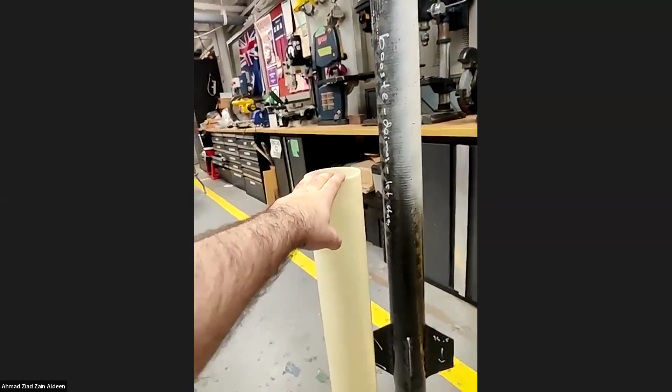We also made a design modification. One of your comments was that the drogue should not be deployed at separation because it's going to be going at Mach 1 almost, well, actually Mach 1.3 something. So one of the couplers, we have an extra piece of it. It will slide inside and it will be closed with more shear pins. That way the drogue will only deploy once it gets to apogee, even when they separate. So the drogue will not deploy at separation at high speed.

Yeah, that would be a bad thing. Hopefully you can piece together the components to show the interstage coupler, or we can look at a drawing so that we can see how the pieces will be laid out. Yeah, for sure. One suggestion that you might consider with the approach that you're using is to instead glue the coupler tube into the top of the carbon tube. Okay.

I'll just give you a term that you can search on, and it's called a zipperless coupler. Zipperless coupler. Okay. Just go ahead and look for that. I did a NARCON presentation in 2021, and it talked about zipperless couplers and why they're good things and why you might want to use them. Since you don't have it installed yet, the concern would be that you're going to be putting out a main and now it has to go through a size reduction. It has to go through the coupler in order to get out.

Yes. And it's actually a better practice to have the coupler in the other tube anyway. So if you want to explore that and maybe look at that as an option, you could do that still. Okay. We will do that. Okay, and that was NARCON 2021, and that's available on NARCON YouTube. 2021 zipperless coupler. Okay. Someone wrote it down.

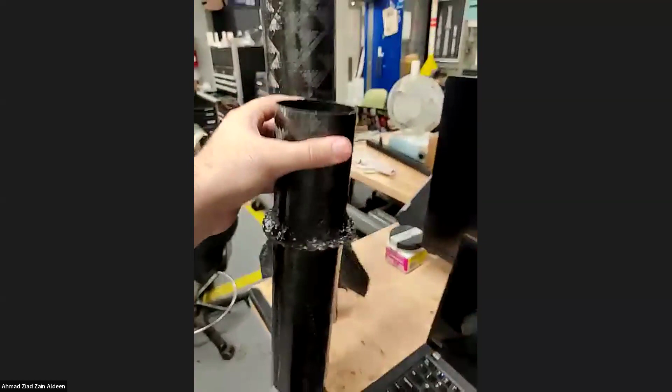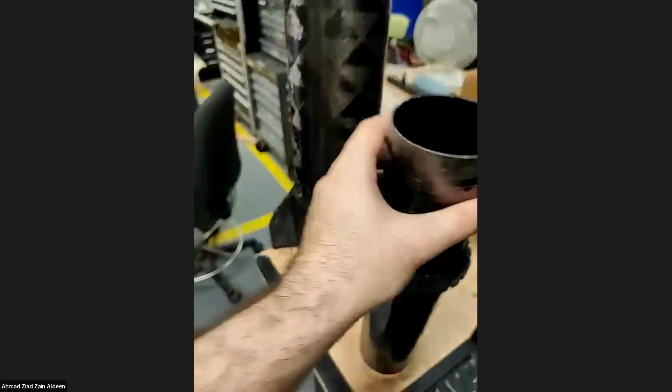For the second stage, I'm just gonna move here. The second stage motor tube is a bit smaller. We already did the tip-to-tip carbon fiber layup. We still haven't sanded it down. It is a little bit shorter because the motor is an L910. The L910 is also smaller in diameter. That's why we have an inner tube. The inner tube right now has a centering ring, and it will slide inside. The centering ring will eventually stop at the fin tabs. Those fins have tabs inside.

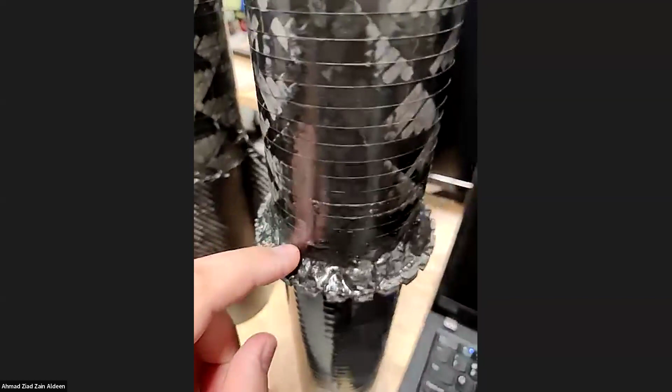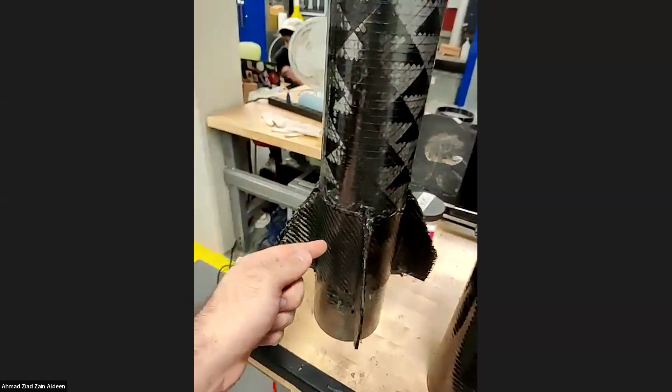So it will rest at the fin tabs, and after it's inside, we will insert a second centering ring from the bottom, also to rest against the fin tabs, and we will epoxy it there. A similar approach: we use epoxy mixed with milled carbon fiber and Cabosil just to make sure everything is strong. Also, because this is going to be going higher in altitude, we're going to drill pressure relief holes. That way, any pressure difference will not cause any issues.

Again, it's going to be a similar setup to the first stage. We will have a coupler, a bulkhead, and then the coupler, and then the recovery section, which is also another carbon fiberglass tube, with a similar approach, pretty much. Sorry, do you have any questions before I continue?

Yeah, let me ask a little bit about this. Your motor is going to fit in that tube, and you're going to lower that down, and it's going to sit on the fin tab, and then you're going to put another centering ring in from the bottom. From the bottom. Yes. And so how much room is there going to be? Maybe pick the rocket up with the fins on it and hold it sideways.

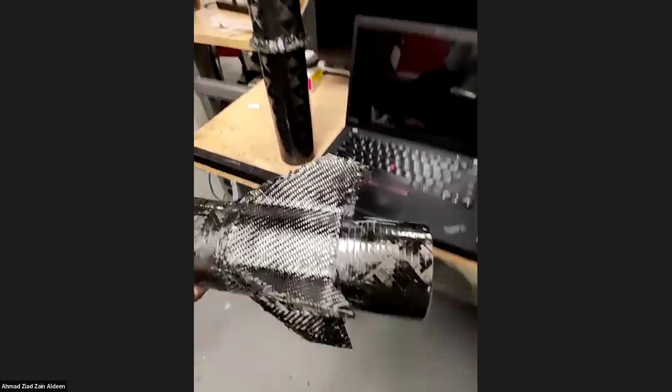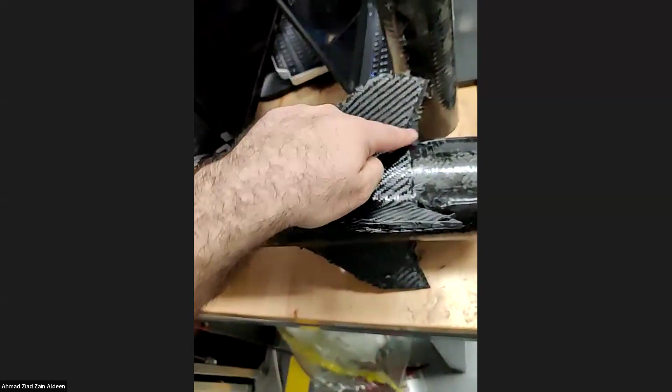This design we have used before. Actually, if you see here, this is our rocket last year. It used the exact same diameter for the outside and the exact same diameter for the motor. And we used the same approach with an inner tube with centering rings on top of the tabs and under the tabs. And it just works fine. We've tested that for a couple of years. It's not like a new approach that we are trying. Okay.

The only comment I want to make is that when you assemble all of this, since it's the thrust transfer location, you want to be very particular about how you do the epoxying. Yes. And the key step that many teams or many rocketeers don't do is, they'll go ahead and sand the surface that's going to be glued, and then they'll clean off the surface that's going to be glued, but then they just put in the tube and put in the fillets.

Those actually have a slightly larger diameter. Our outer diameter on the rocket is 4.11 inches. Those are 4.25, and that's why after we put them in with the couplers and everything, we're gonna make a little fillet with Bondo, so it doesn't have a shockwave. Although I did simulate it with shockwaves without any fillets in Ansys Fluent CFD, and it would still withstand everything, but of course we don't want a sudden change in diameter, so we're just gonna fillet that. Or actually chamfer it.

Are you using one clear section or two? Only one. But we have a second one just in case something breaks. Okay, and that is your payload? Yes. So the actual payload is this one here. This is just a prototype so far, but there's basically a servo, and there will be more sensors that will measure the rocket roll, and it will be rotating opposite to that. So the camera will not be going crazy with the rocket.

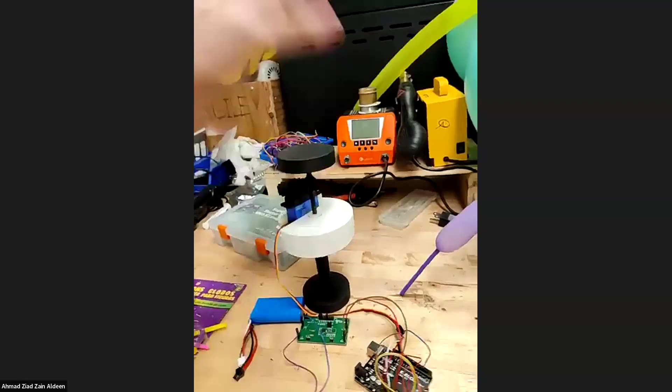Okay, the bulkheads for that, we have two sets of bulkheads actually. Two are aluminum and two are steel. So based on how much it's gonna weigh at the end, we might go with steel if it doesn't reach the 8.8 pounds. But if it does, we're just gonna switch to aluminum, because we don't want to go overweight, pretty much.

Can I interrupt and just ask a question? Yeah, of course. I want to go back to your interstage coupler. Is your coupler, I thought you said your coupler would be attached to your sustainer. Is that correct? Yes. So the coupler's glued into the sustainer and drops into the booster. Yes. So then the motor goes to the bottom of the coupler. Is that correct?

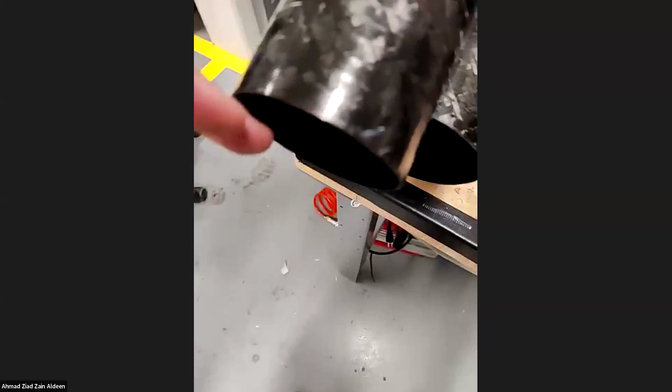Yes. So this will actually have 1 inch going outside, and when the coupler goes, the coupler will even be extending a little bit more. So the nozzle is actually going to be slightly inside the coupler. So how long is that coupler into your booster tube? Is it the full 4 inches or is it less than that? Oh no, it's full 4 in both ends, like 4 here and 4 in the booster. So your motor's basically sitting 4 inches farther down than the bottom of the tube.

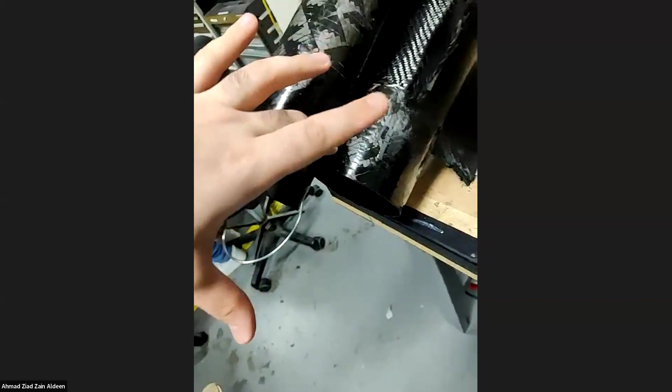No, not really, because the end of the nozzle is around 2 inches inside because this inner tube actually protrudes out a little bit from here. So it's gonna be 4 inches in total. So 4 here and 4 here. So it's gonna be kind of like in the middle. Once we open the OpenRocket, this might be easier to see.

I'm just concerned your nozzle's gonna... I guess it doesn't really matter, but your thrust is gonna torch the tube, unless your nozzle's at the bottom. And then you're gonna have a vacuum. So yeah, it is something that we were thinking about. But to be honest, this is our first experimental two-stage, so we're not too particular about reusability right now.

Yeah, but well, Jim might have more of an opinion than I do, but I mean, you're potentially dropping burning pieces of carbon off the bottom of the rocket in the desert. So it's a question of whether ESRA is comfortable with that. That's why I'm asking.

Well, I thought that the interstage coupler was going to slide into the bottom of the rocket and would not be glued to the sustainer, but would be glued to the booster. Did I misunderstand that? Yeah, it's glued to the booster, but the motor's inside the coupler and it's recessed up into the coupler. So their thrust is going to be inside the coupler. Maybe not very far, but it's still inside the coupler. It's around 2 inches.

Okay. Maybe position the coupler where it will actually be, or let's not call it the coupler, let's call it the motor tube. Position the motor tube where it will actually go to. So if I understood what they described, Jim, the motor tube is above the fins and there's no tube over the motor below. Is that right? No, I don't think that's it. Here, let him show us.

Sorry, it's a bit hard to push right now unless I want to hammer it. But basically, thank you. Basically, as you can see, they are now inside each other. So it's not all the way through. But when it gets all the way through, it will be an inch outside here. Okay. So which is where the motor will go then, right?

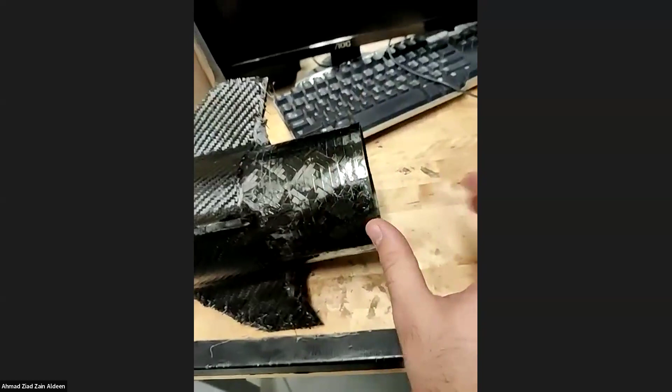Right. And so the motor also has like half an inch, and the nozzle is also a little bit there. So the very end of the nozzle, the exit area, is gonna be 2 inches away from here. With a 4-inch coupler, it's gonna be 2 inches inside the coupler. So the nozzle's inside the coupler. Yeah, by 2 inches. Yes, that's what I thought I understood. Yes, correct.

Okay, so do you have the interstage coupler yet, or is that something you're still waiting on? No, we're still waiting on it. It's gonna be delivered in a week or two, probably 2 weeks. Okay, and are you going to put a switch band on that? Sorry, a switch band? What do you mean by switch band? Well, okay, if you don't know, then that's not what you're planning. Oh yeah, I guess.

So you're gonna have the coupler then, it's gonna be how long? Well, it's gonna be 8 inches in total. Okay, so 4 inches is gonna go in the airframe, and then you're gonna have 4 inches sticking out, and the motor's gonna go 2 inches down into that lower 4 inches. Correct. Okay, and is there gonna be a bulkhead in the coupler? No, there isn't gonna be.

Okay, so then that coupler is going to go into your upper airframe? No, I mean, into the upper side of the booster. Yes, correct. Okay, and what's the next component that comes along? First you have the coupler, 4 inches into the booster, and then there's gonna be the shroud that goes around the drogue, which is attached using shear pins, so the parachute will not come out until it gets to apogee.

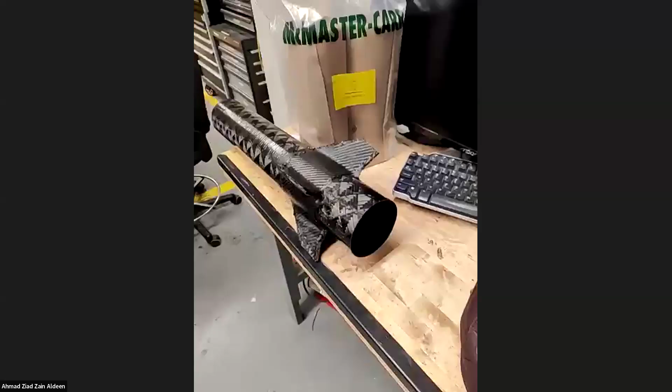And you can imagine that if the booster was really, really heavy, its momentum is basically pushing the stack, and so there's actually more drag after it separates. I always give an example. Imagine you have a heavy booster like that, and your sustainer is a model rocket. That model rocket is never going to separate from the top of it, because its momentum is very low relative to the booster. On the other hand, if your sustainer motor is very heavy and the booster motor burns out, then the sustainer is going to want to separate.

So what you need to show me is, what does your simulation show when you go through the analysis of the stages separating a second or so after the burnout of the motor? And if it looks like it wants to drag separate, then we just need to make sure that the coupler fits very well. And then it will most likely drag separate.

Okay, that makes sense. We'll do that. I will send you the results tomorrow. You don't have to send it to me tomorrow, but do that analysis and send it to me when you can, that demonstrates that it wants to drag separate. Okay, we'll do that. That sounds great.

Are you using OpenRocket for your analysis? For basic analysis, yes, but sometimes we do more CFD in ANSYS Fluent if we need more detailed results. I can't remember where it is, but there's a section in OpenRocket that calculates drag on various components of the rocket, and you may be able to use that information to determine whether you can drag separate or not. I have used it for what size of shear pins I need to use for various things, and that drag analysis is helpful.

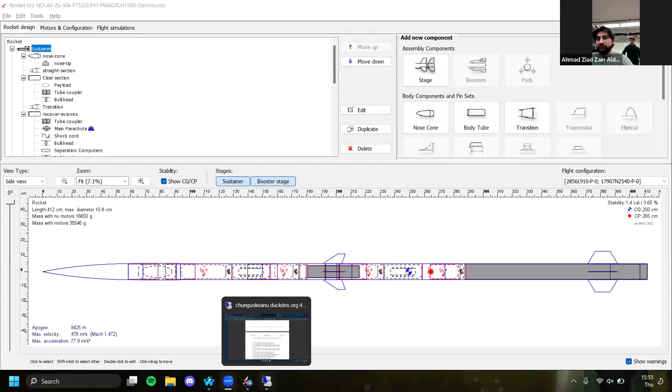Okay, so this is our report. Can you see it on the screen? Yeah, are you able to make it a little bit larger? Yes. There you go. Okay. What I'm thinking is that maybe we just start through it from the top, and I suspect there will be pictures and tables and so forth that I have questions about, so we might as well just go from start to finish. Okay. Sorry, I zoomed out by mistake. So this report is actually a second revision. We had other authors before.

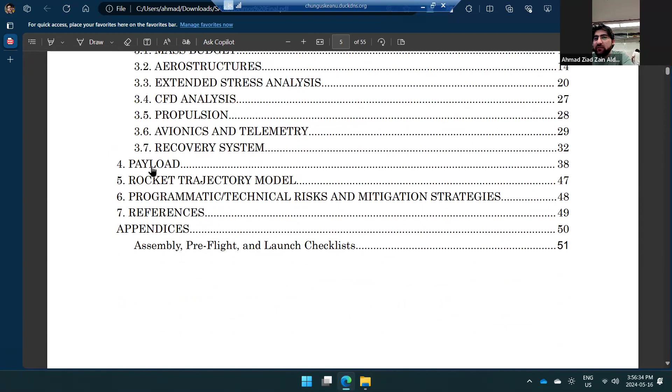So this is the table of contents: team history, organization, mission concept of operation, mass budget, aerostructures, extended stress analysis, CFD, propulsion, avionics, and telemetry and recovery. And then we're going to talk a bit about the payloads and the rocket trajectory model. Do you want to go through the team history and organization? No, I just want to see the drawings of the rocket for the most part.

Okay. So this is the concept of operation: the launch, the staging, the separation, etc. Okay, let me look at that just real quick. Okay, I don't really have any questions about that. Let's just keep going. So this is just a text explanation of what the picture had, so nothing really different. Do you want to go through it? No, let's keep going.

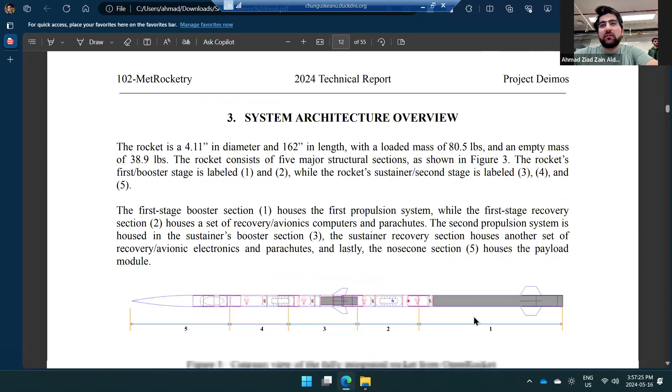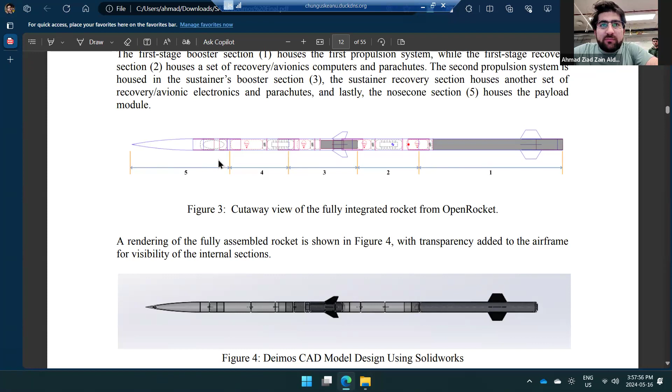So system architecture overview is just the rocket itself, a picture from Open Rocket. Yeah, okay, let's stop there for a second, and let me see if I can see your cursor. Yes, I can. Okay, so start on the left of the drawing there and just point out what each of the internal components is. Internal, okay. I'm gonna zoom in. Actually, let me open Open Rocket. It just might be clearer and easier to see.

Okay, so the nose cone, of course, the clear section here. There's the two couplers for it, and here is the payload. And then we have the main parachute. We have main on top and drogue on bottom. Here we have the electronics. Yeah, I think this has changed from what I saw. But that's okay. What you have there is what I would suggest, and then you're going to put out the drogue first. So where is the tube break for that? The tube break is here at the blue line. This is the coupler highlighted, and the break is exactly at the middle.

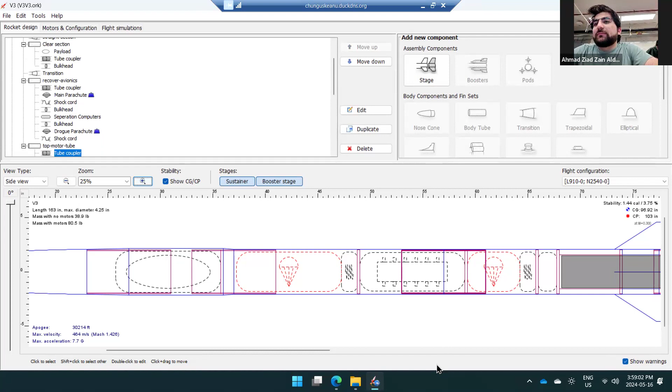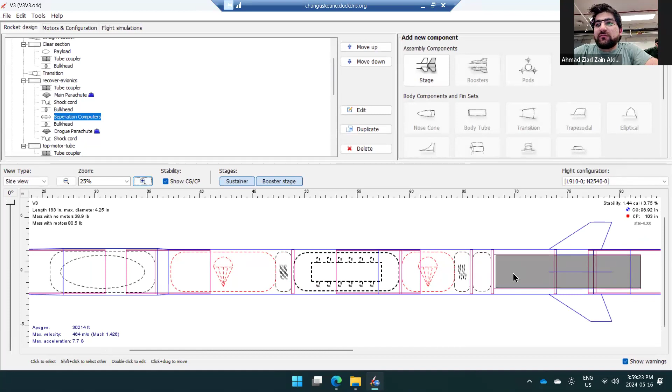Okay, and that's the coupler. And here are the recovery avionics and tracking stuff, and the drogue and the motor retainer and the actual motor. Oh, okay. So are there some additional descriptions of the recovery configuration, or should we talk about that here? No, there is in the report. Okay, so you have the main chute there, and then you have the drogue there.

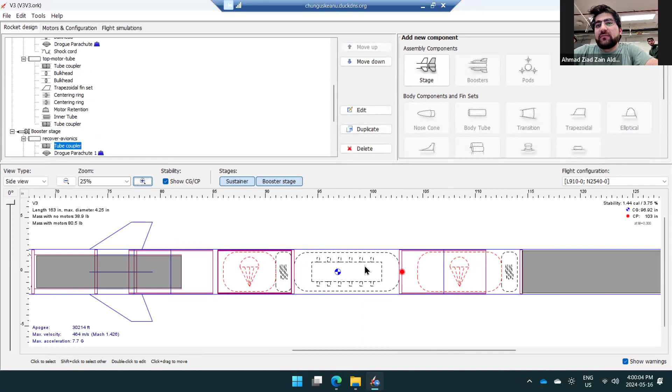Here's the stage separation. Here's the coupler between the two stages, and then the drogue with the piston around it, the recovery electronics, main stage, and then the main booster. And overall, that's more or less how it looks. Okay. Another option, I'll just throw it out and you can consider this. If I had a concern about the drogue coming out of the top because of the staging there. Sorry, you would have a concern regarding what? Well, we talked about a possibility that the drogue might not come out if the top of the tube gets damaged, right? Yes.

Hypothetically, if you put the drogue in the middle and the main on the top, the opening of the drogue would be more reliable. Oh, like switching the places? Yeah, because that part of the rocket wouldn't get damaged from the hot staging. My main concern from a safety point of view is getting the drogue out. But wouldn't the main be the more important one, because it actually slows it down to a safer descent rate? Not really. You want them both to come out, but if the drogue doesn't come out, the rocket's just going to come back ballistic, and the main parachute coming out isn't going to help you. It's just going to strip it.

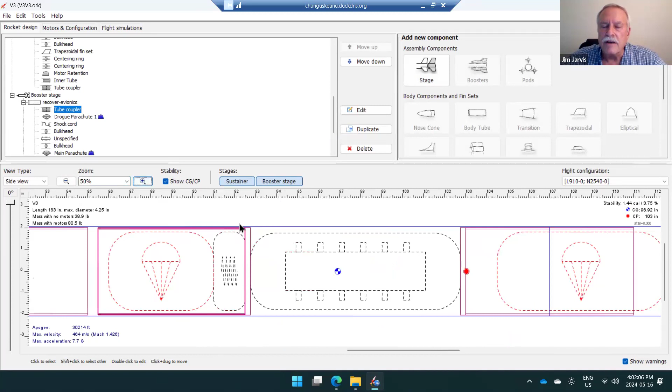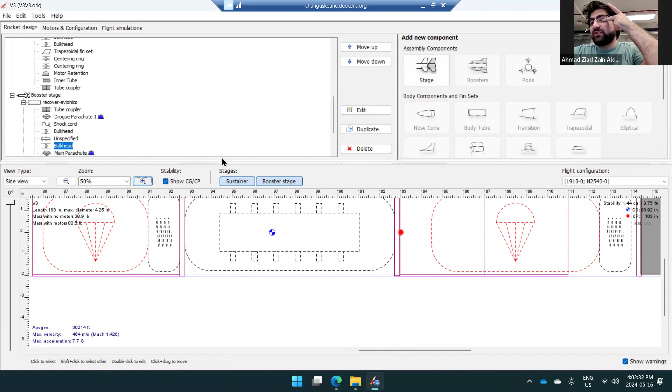Oh, I see what you mean. Whereas if you put the drogue out first, at least it's coming down at a speed that's not ballistic. And then you hope to get the main out, but at least the rocket's apart and it's not ballistic anymore. So that might be doable if the bulkhead here is made a little bit smaller so that it slides into the coupler. But we said that we're gonna be doing drag separation instead of hot staging. Well, it's just insurance; if you are able to do it, it would alleviate any concerns about not being able to get the drogue out.

I see what you mean. I'm not saying that you have to do it. I'm just offering it as a potential way of making the rocket safer. Okay, I'll keep it in mind. After we check the drag separation numbers, if the numbers are concerning, we can just switch them for safety. Okay, so let's look at that first. And then the fallback is reversing the drogue and main, so that way you can say we're very likely to be able to get the drogue out. Okay, makes sense. Let me just make a note here. Okay.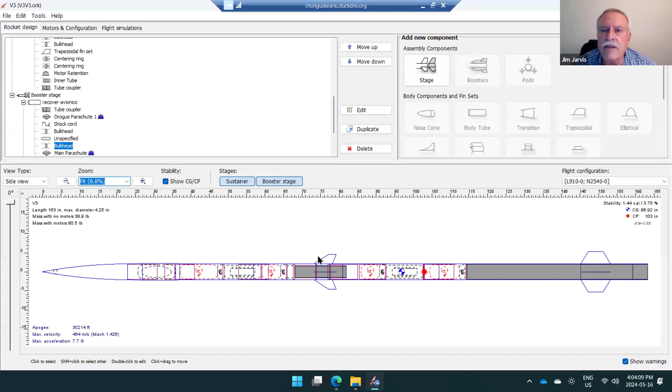Okay. So now I know where the configuration is. The last OpenRocket I saw had the drogue and the main chute together, and it looked like it comes out of the same tube. But this version doesn't have that. For the sustainer, right? For the sustainer, yeah, we did change it after your comments because it made sense. Yeah, I'm not sure I understand now if it was intended to be drogue and main out of the same opening or not.

It was not the same opening. They had a bulkhead in between them. But your comment actually made way more sense, so we just changed the design. Okay, what you have is okay from a configuration standpoint. The challenge that you face with the conventional deployment system is that when the rocket's falling under drogue, the nose cone's pointing straight down. And so now you blow the main out, and it just fouls against the tube, because you want them to fly in a V shape under drogue. You know what I mean?

When a rocket's falling under drogue, the way you normally want it to fall is in what's called an inverted V. Yeah, what looks like this, coming down like this. The problem is that when you have the heavy payload, instead of being like this, it's like this. Oh, I see what you mean. And so instead of the main opening outward, it opens down and immediately blows back up into the tube it came out of. So that's the design challenge to solve. I see. This might be a bit difficult to change right now.

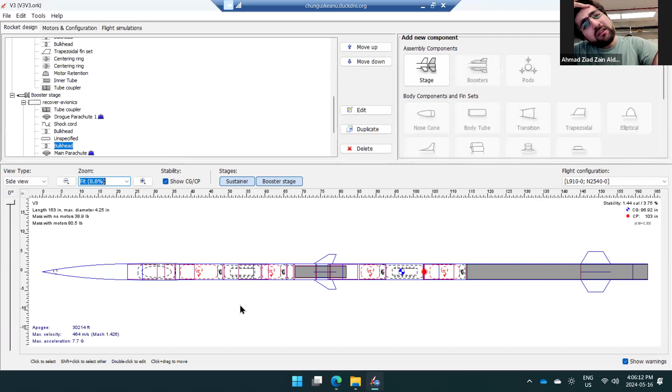I'll give you the secret word that fixes this. Actually, it might not be too difficult to change. I'll check that. Sorry, I didn't hear you. I think it might be possible to switch them. I will check that. Well, you don't want to go drogue over main either. That's even worse. It's worse? Oh, okay. You know, when you have a payload on a rocket, it makes recovery difficult, and there's no really good way to do it.

But when you're using the conventional configuration, main over drogue, the secret to making it work is a deployment bag. You can Google that and see how to do that. What the deployment bag does is it keeps the main contained for a few tenths of a second till it gets past the airframe, and then it pulls the chute out. That's the secret. So take a look at deployment bags and how they're used, and if you can integrate one, you'll greatly increase the chances of getting your main chute out. Okay, makes sense.

So I guess let's go back to the report. Yeah. Just one second. Can you hear me better now? Yes, you're not echoing now. Okay, sorry about that.

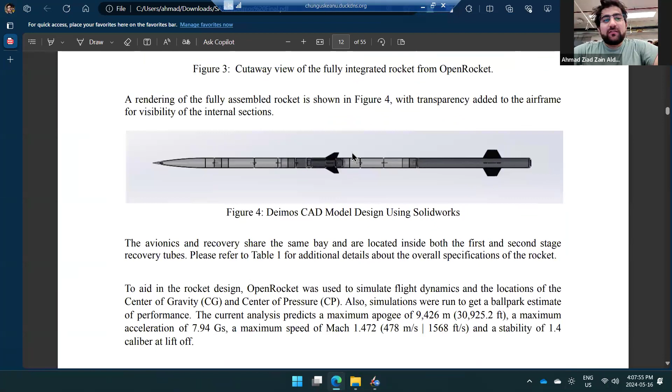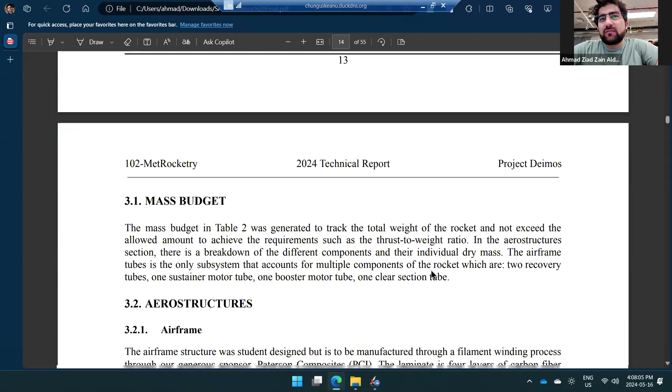So we were here. These are some numbers, diameters, lengths, and stuff. Mass budget. This is our centering ring. By the way, it has a little hole, so we'll be able to pass the igniter down through a tube. Just makes life easier. Oh, just the wires. Yeah, we have a little tube that goes through. I see. Okay. And what else do we have here?

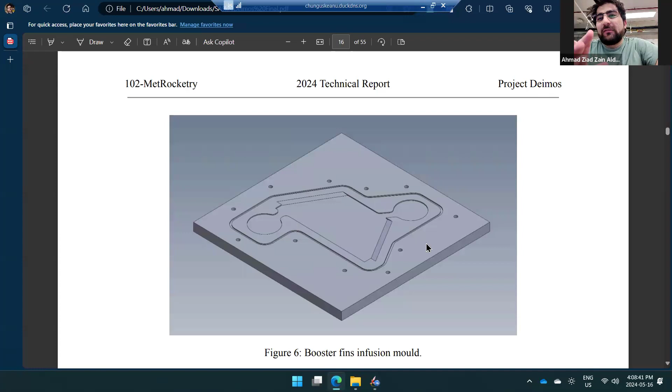This was our intended way to make the fins, through epoxy infusion. But the CNC at our school was broken for a bit, so we just ended up making plates and water jetting them. But this way was amazing. We can put it on a heater, so it's out of autoclave, and this gave us amazing performance over the years. But the plates way also works; that's what we had last year in our rocket. I just wanted to talk about it because it's a cool thing we did for a while. Same thing for the sustainer, but same issue.

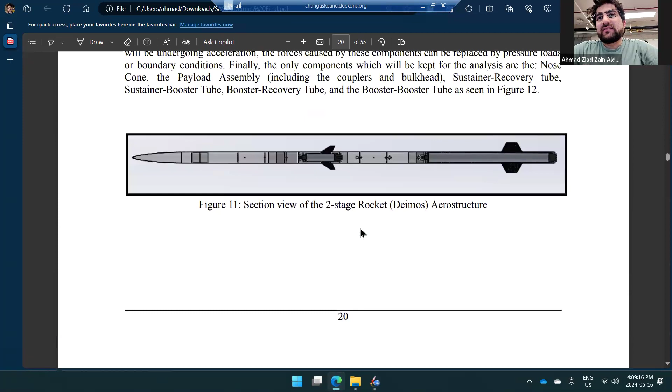And so that's a slightly more detailed CAD model. This is how we sectioned it when we put it into the stress analysis software in ANSYS.

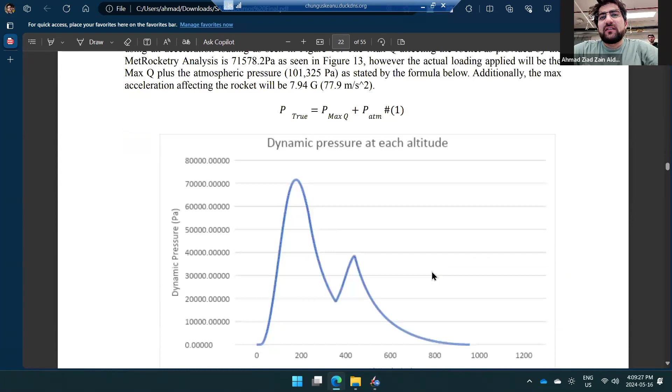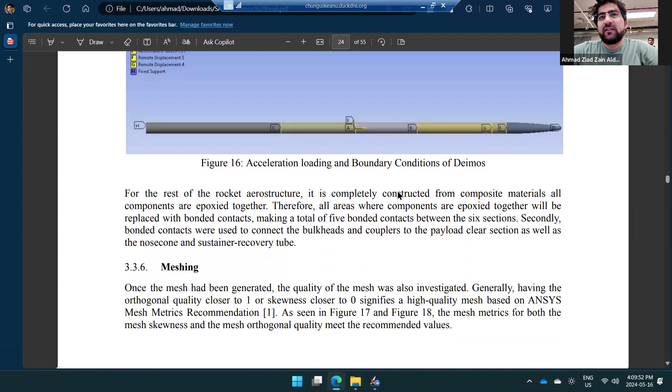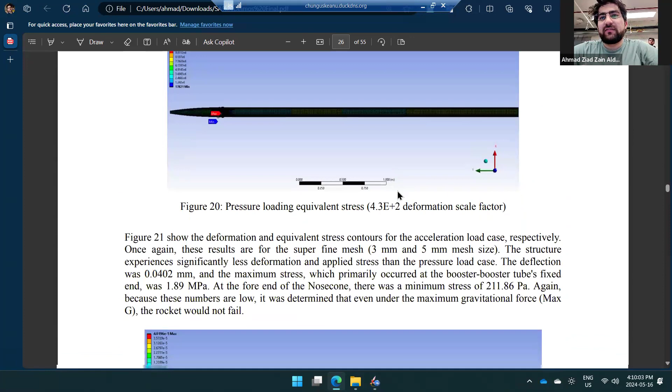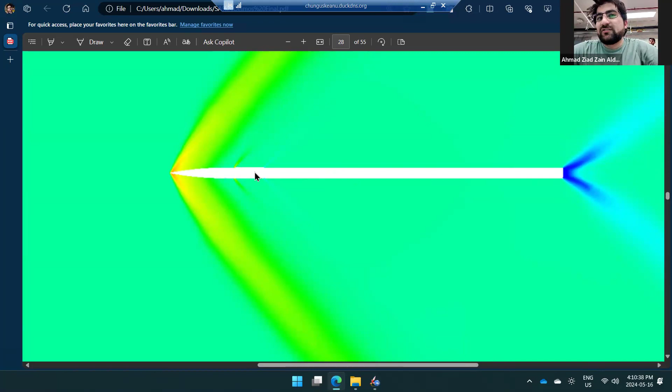So everything is okay. More stress analysis stuff. Actually, no, this is flow. This is CFD stuff. So this is our shockwave, how it's gonna look under maximum Mach, which is 1.4, 1.45 I guess I put. This is the pressure distribution. As you can see, there is a little shockwave here. I don't know if it's very visible on the screen, but again, this is a worst case scenario where the payload section does not have a smooth transition. Everything still works fine with this, but of course we're going to add a smooth transition to have a weaker shockwave.

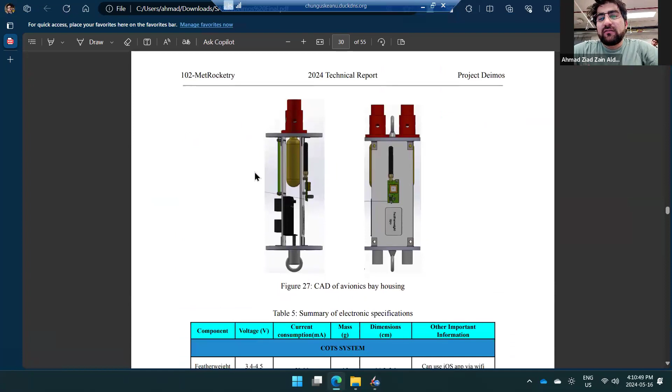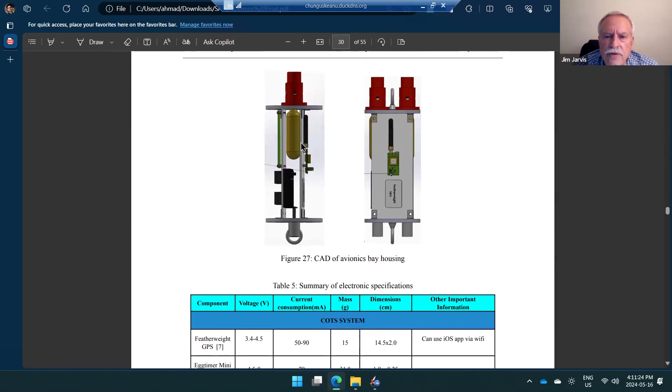Okay, so if this is all we can look at, let's spend a minute or so here to look at this design. So this is for the first stage. The second stage has different flight computers. It has EasyMega and TeleMega because they have the tilt lock. Right, okay. So you have an eye bolt at the top between the CO2. Yes. Okay, and there's a nut or a fitting on the back side of that, correct? Like under it? Yes, of course. Okay. And we usually use lock nuts just to make sure that they don't come off.

Right. And so when the rocket recovers, on this one you're going to have a drogue on one side and a main on the other, right? Yeah, sure. Okay. So how do you handle the force of those deployments? How do we handle them? Well, we just make sure... What holds the two? What is the connection between the two bulkheads? The connection between the two bulkheads is through the plates.

So the plates are made out of fiberglass, and they are bolted on both ends. But also there is really no force transferring between the two bulkheads because the bulkheads are screwed from outside to the airframe with 12 eighth-of-an-inch screws. Both of them are screwed, of course. So the force really just goes to the airframe. Nothing goes in here. Okay, and how many screws was that? Our stress analysis lead said 12 would be optimal, and he said we can go with 6, but 12 is just better, higher safety factor.

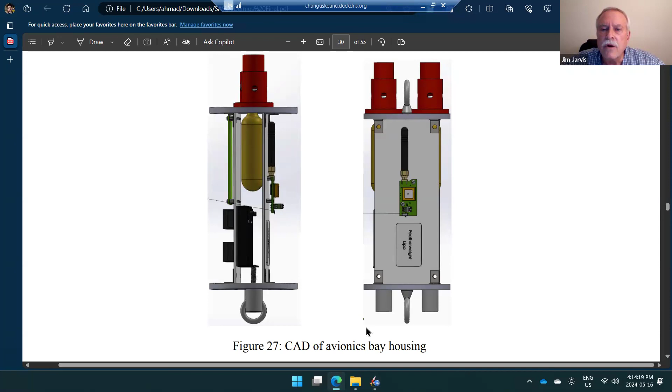And what size are they? Eighths of an inch. Okay, I'm not sure what number that is. 0.125 of an inch. That's 0.125? Yeah. Oh, okay. So you're gonna screw that in both bulkheads from outside. Yes. Okay. And I think I see two CO2s and two black powders. So this would be your booster. Yes. Okay, and the black powder will be for the main? Correct. Okay, let's go on.

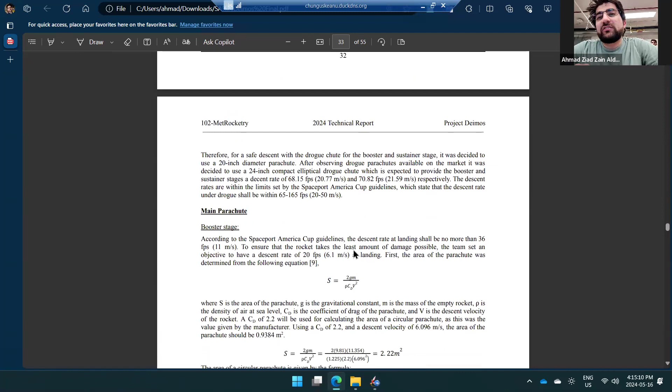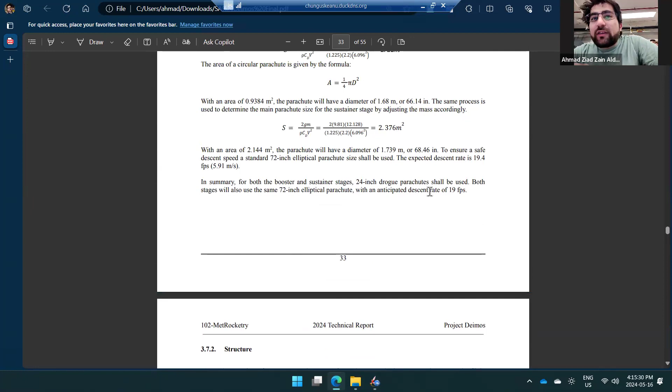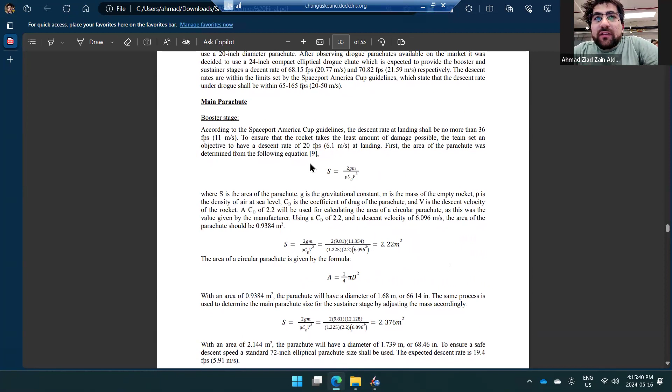Recovery system. We did some parachute sizing calculation. Nothing too impressive or important. And I didn't see descent rates in there. Are they listed somewhere? Where are they listed, the descent rate on the report? Okay, wait, here they are. So, let's see, for the booster, I saw something. According to... the team set an objective of a maximum descent rate of 20 feet per second at landing.

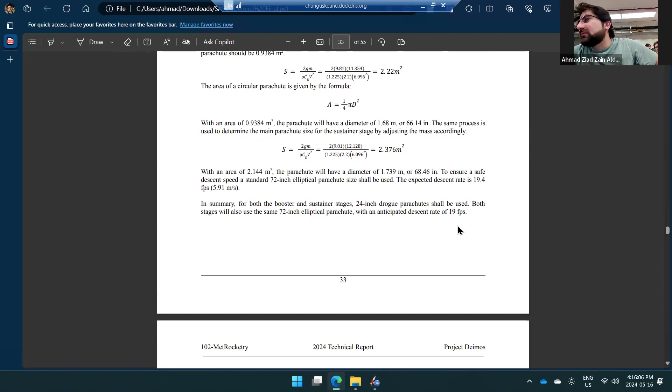Summary. Okay, so this is for the first stage or both? For both stages, the descent rate anticipated on touchdown is 19 feet per second. 19 feet per second, okay. I remember two stages had a very high drogue descent rate. Okay, the numbers that are in OpenRocket are not always correct for some reason, so we do our own math to make sure.

Okay, this was in the text that I saw, and I didn't get it from the OpenRocket file. Oh, really? I got it from the text. Oh, interesting. Which one? I could look it up, but I don't care what it says there. I care what you think it is now. Okay, so I'll let the recovery lead explain that. Okay, here's the video.

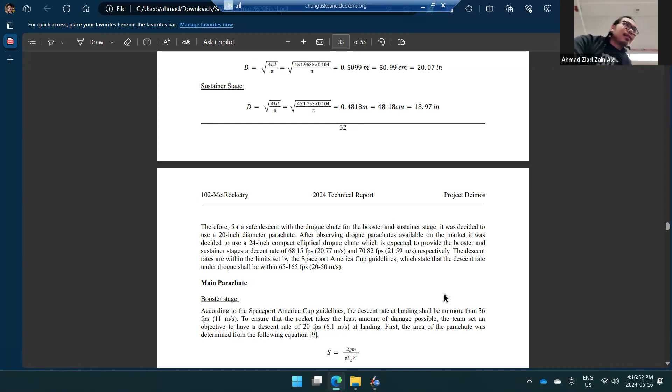Yeah, so as you can see in the report, for the booster stage, when the drogue deploys, its descent rate becomes 68.15 feet per second, and for the sustainer, it's 70.82 feet per second. And then for touchdown, it's 19 feet per second for both of them.

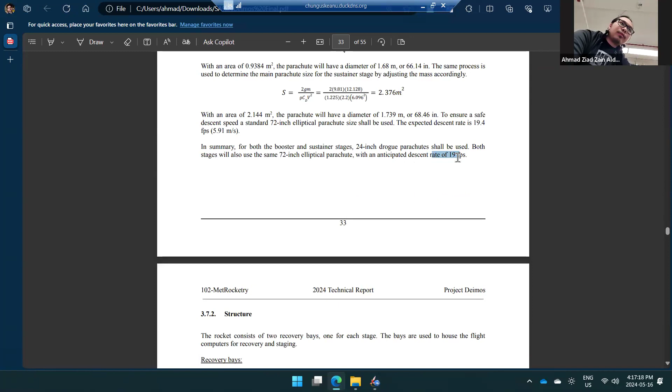Okay, and how big are those drogue chutes? They're 24 inches. Okay, 24-inch, and what style? Are they elliptical or toroidal? They're elliptical drogue chutes that we get from Fruity Chutes. Fruity Chutes has a descent rate calculator, which we use to determine the descent rates for these.

Okay, those numbers look fine, and they're a lot different than what was in the second progress report. It was like 155 or something. So that looks quite a bit better. One thing to keep in mind when you're looking at these descent rates is that the Fruity Chutes descent rate calculator is at sea level. At the point where the drogue is transitioning to the main, you're at nominally 5,000 feet, so there's a fair amount of difference there.

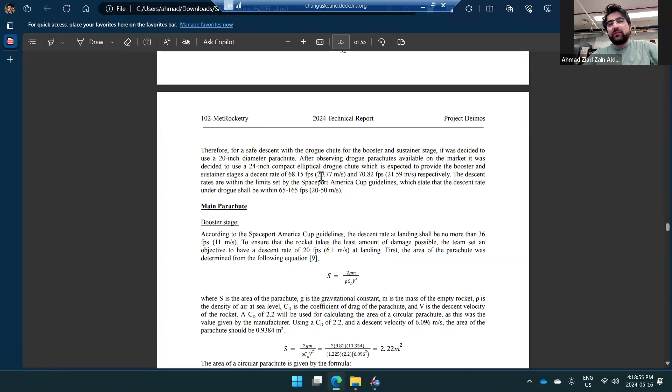So when you cite the numbers and do your on-site safety review, you should say something like, here's what the descent rate calculator gave us, and adjusted for altitude, it's a little bit higher. Okay. We will actually check that, and we still have a little bit of money, so if we need to get a bigger parachute, we will be able to. Well, I think the rates you're talking about are okay. Just don't be misled by the descent rate calculator, because those numbers are at sea level. Okay, makes sense.

If you don't end up flipping your bays on your booster, you might want to consider a larger drogue on your booster as well, because it's harder to keep it from becoming ballistic with a smaller chute, because you're really long. You run the risk of the mass of that booster overwhelming the parachute, and then you'll come in ballistic anyway. So if you reverse it, you're naturally destabilized and you're okay. If you don't reverse it, I would recommend a bigger drogue chute. Okay, we'll keep that in mind.

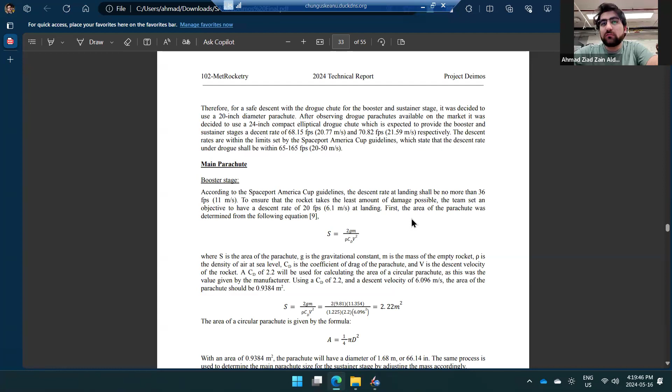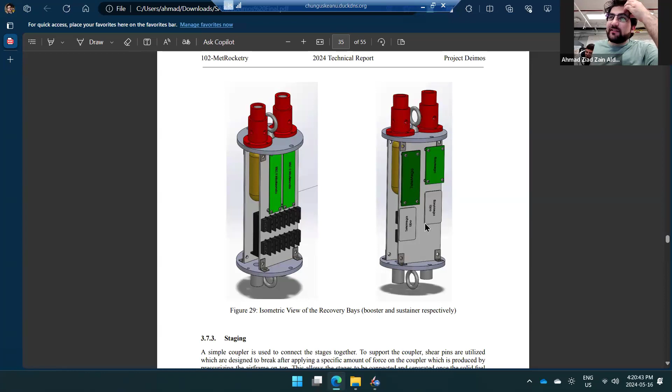Although there is a very slight chance we might switch one of those to the Blue Raven, because some other teams suggested it a lot, and we're playing around with it, and we kind of like the interface setup. It also uses a manufacturer supplied battery. I just wanted to mention that in case we end up switching one of the computers. We kind of want to try something new. That's really the only reason.

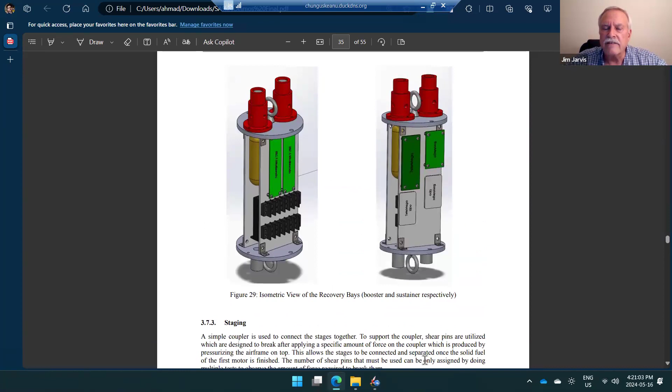Okay, my personal opinion is that the EasyMega, TeleMega, and the Blue Raven are pretty equivalent. The Blue Raven does have the interface, which is nice, but the thing that's of most concern to me is the programming for the sustainer igniter. And the programs between the two would be very similar. Yes, they will definitely be similar.

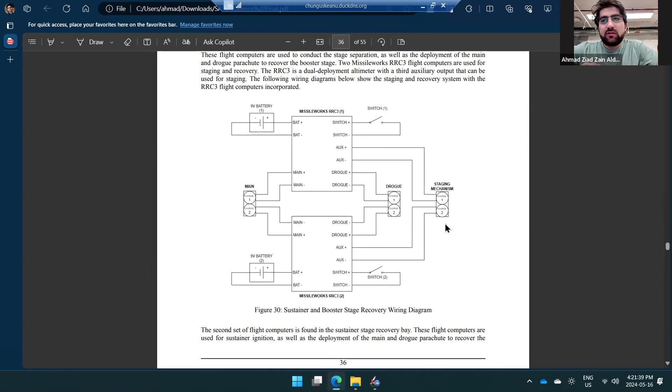And here is our first wiring diagram. By the way, there are two charges for both of them. They are in the same box, but there's actually two charges. So everything is redundant. There is nothing in common between the two computers.

And I think there's like, how much was it? 1 or 2 seconds delay between them in case. You want to talk more about recovery stuff? You don't have, okay. But yeah, this is a wiring diagram for the first stage.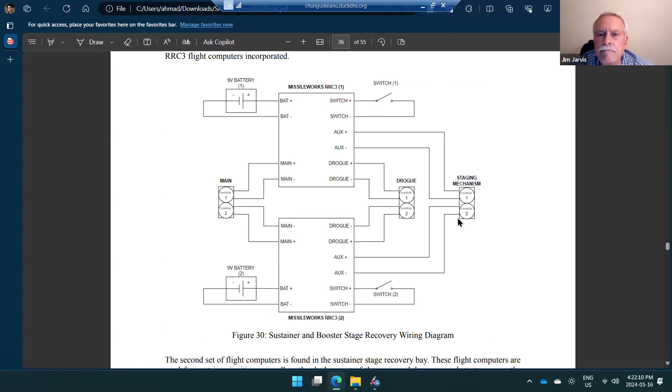Okay, so what is the staging mechanism? Because we've been talking about drag separation, and you haven't mentioned anything about a separation charge or anything. So what is that? Oh, you mean here? Oh, actually, what is that? Yes. Okay, I think that's a mistake from our previous design. Yeah, this should not be here, because the staging mechanism was the hotspot. Sorry, this should not be here. You can ignore this one.

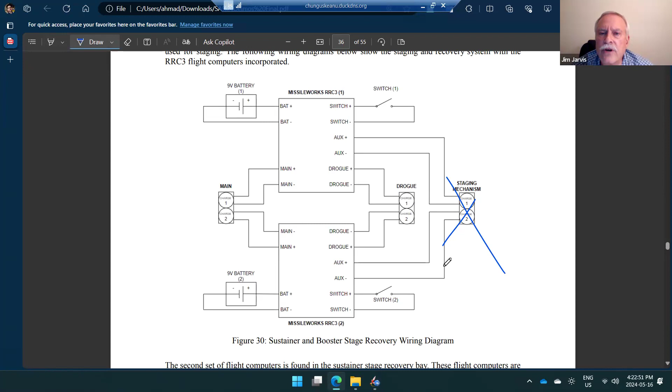Okay. And how are you going to secure those 9-volt batteries? It's not very visible here, but we have a little plastic clamp that we actually, can you give it to me? Yeah, we have a little battery holder, and we just kind of secure it. We screw it in, and I think last year it had a cover. Wait, is that the cover for it? No, that's a different cover. But yeah, it also has a cover that comes on top.

Okay. So, I'm going to recommend to you that you not use those. Not? Why? Because the battery can become separated from those terminals. The terminals don't have spring loading, so somehow or another you have to force the battery up to the terminals, and under acceleration that can fail. And I'll confess that I lost my L3 rocket because I had battery holders like that. So I have a pet peeve about them.

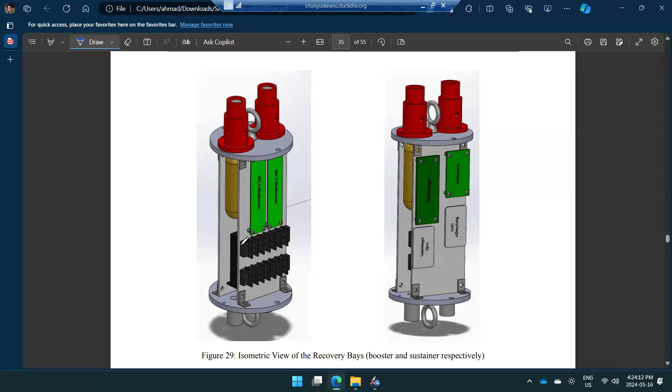What I would suggest you use instead is you just get the little plastic wire connector that connects onto the top of the battery and has the wires coming out of it. Hello, Peter? What I would suggest is you get the little plastic connectors that have the wires that come out of them, and one thing you can do then is wrap electrical tape around the perimeter of the battery over the top of that connector so that it can't come off.

Then when you mount the battery on your board, you use a zip tie both up and down and left and right to hold the battery onto the board. Okay, we'll do that. And don't use that battery connector. Okay, sounds good. Let's see. So yeah, this was a mistake. Okay.

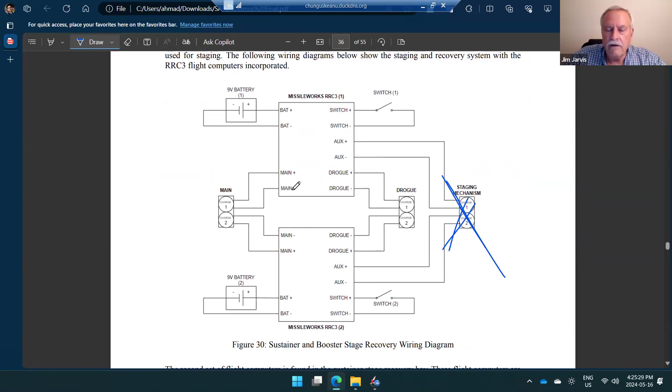And that's for the second stage. So we have the igniter and the drogue and the main. And I guess we're going to switch from magnetic switches to key switches, if that's what you recommend. Everything else is quite standard, nothing too crazy. Okay, now it is a rule that you have to have a switch between the altimeter and the igniter. Oh, I see. And I suggested that you only use one altimeter for this. Yes, correct. Not two. I mean, you can use two if your heart's set on it.

But the thing that's important as far as getting the sustainer lit is to have the igniter stay in the motor. It's not the E-matches and it's not the number of altimeters, because if your altimeter is supposed to work 98% of the time, it'll fire the charge to the igniter. So when you use two altimeters, you might go from 98 to 99, but your chances of failure double, because you have double the chance of inadvertently lighting the sustainer when you don't want to. I see. So it's false reliability to use two altimeters; just use one.

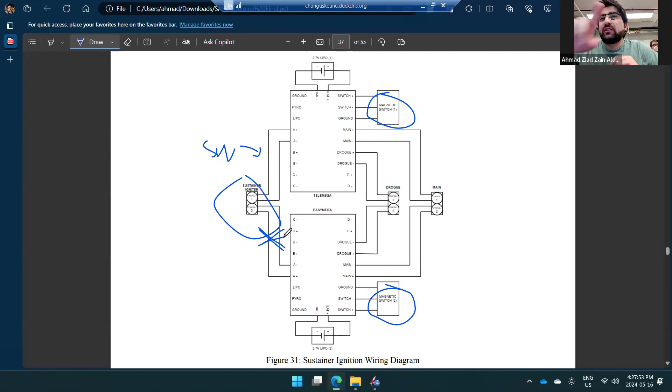Right. Now, if you're going to go with the key switches, you can get a double pole, double throw key switch. So we can have one switch for both of them? Well, what you do is you have a switch for both legs of the igniter. But then the other thing you do is you have the other two legs wired together so that you shunt the igniter when the switch is in the off position.

I'm not sure I understand. Well, are you familiar with the idea of twisting the igniter leads? Yeah. So twisting the igniter leads is another way of saying you're shunting the igniter. Okay, you're just shorting out, you're just making a continuous path of the igniter. So if you can imagine the igniter and the circuit is essentially like twisted wires. It comes up to the switch and it goes past that shunt and then back to the igniter. So that's shunting the igniter when the switch is in the off position.

And then when the switch is in the on position, it removes the shunt, but connects both legs of the igniter. Okay. So that way it's impossible to misfire, right? It makes it more difficult to do that. Okay, yeah, I understand what you mean. The basic rule is you have to disconnect at least one leg to the igniter. Better is separating both legs to the igniter. And better still is separating both legs and shunting the igniter. Makes sense.

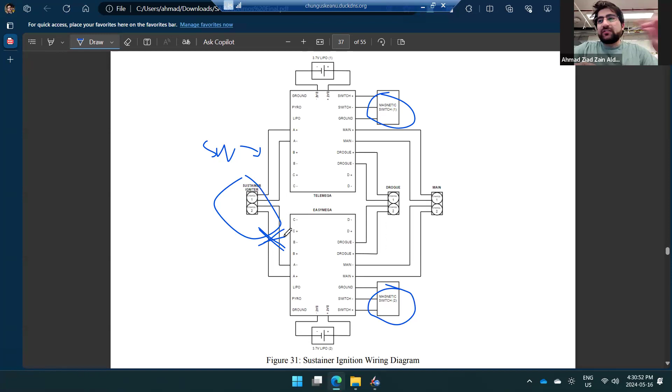Just to make sure I understood correctly, when you were talking about the batteries, you meant we use those, right? Yeah, something just like that. I prefer to use ones where the wires come out of the top instead of out of the side. That makes it a little easier to wrap the electrical tape around the battery. But you can go the other way around the battery too if you're going to use zip ties. Just wanted to make sure of the connection, and like I say, you can positively connect that with the electrical tape so that it won't come apart.

Sounds good. I've just got to pipe up for a second. I've got to drop out. I've got another appointment in half an hour that I have to leave for. So, John, I'm sure will stick around, but I have to drop out. Sounds good. Thank you, Shane, for coming. Yeah, you bet. All right, so let's keep going.

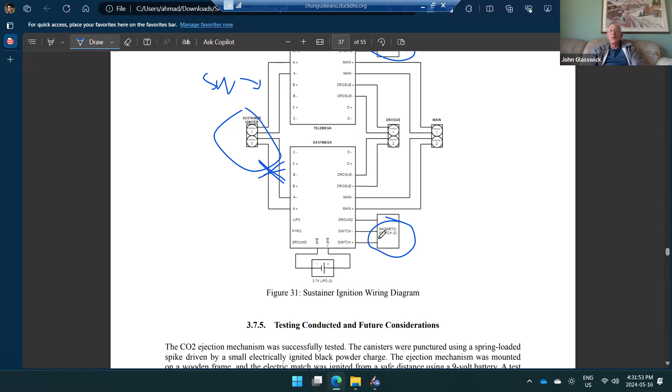Jim, you mentioned the way they're going to install the igniter in the sustainer motor. Do they have a plan for that? Our plan was just to put it on a long pool noodle and just push it all the way inside. Okay, just want to make sure you don't want it falling down with acceleration. It's too light anyway, it's made of foam and it's probably going to burn by the time everything is ignited. No, I don't want the igniter to slide out of position when the booster ignites. Okay, now I see what you mean. We had that in mind. All right, so let's talk about that a little bit.

So what kind of igniter are you going to use for the sustainer? They usually supply the igniters with reloads, so we're just going to be using that. Okay, I refer to those igniters as the igniters that you purchase that are already broken. Do you have the motors yet? Yes, we don't have them here in the workshop, but we bought them last year. When will you get possession of them? We're going to pick them up a week before we drive down to the US.

Oh, you're not going to try and drive through the border with them, are you? We are actually, we checked and it's perfectly fine, because they're uncontrolled goods, and there was actually a letter for borders specifically for those types of motors saying they are okay to transfer, and we asked other Canadian teams and they said they did it. So from different sources we are quite confident we can take them with us. Okay, I'd be interested to find out. Yes.

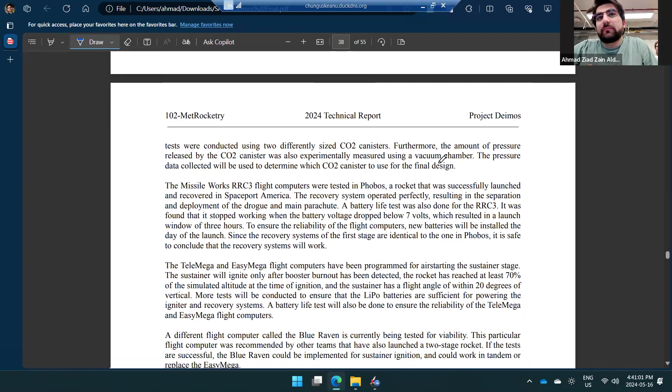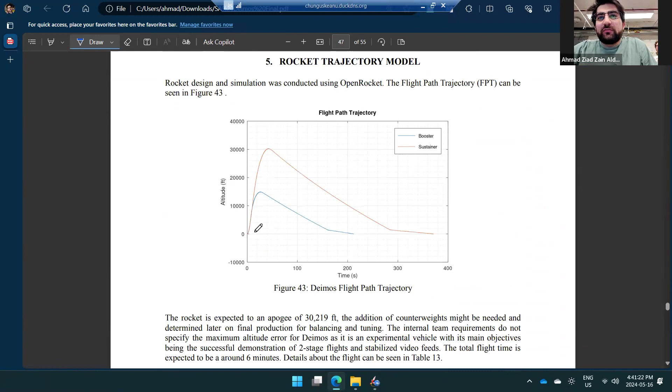Well, the next section is payload. Yeah, I don't much care about the payload as long as it's not going to come loose. Okay, sounds good. And then more CADs of the payload. Where are we right now? Well, rocket trajectory model, so how each stage is gonna look more or less. Also quite standard. Go back. There were a few other drawings. Let's back up a little bit. Oh, and this is for the payload section. Okay, got it.

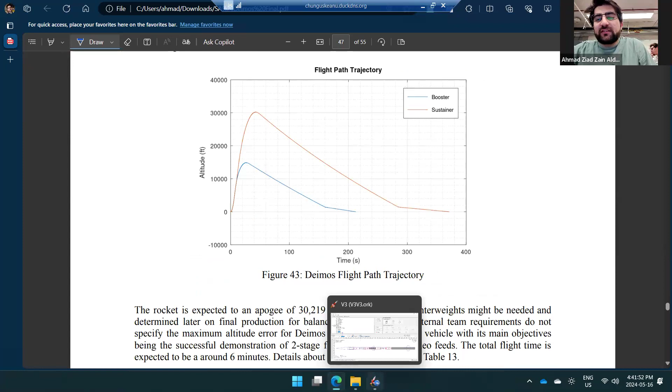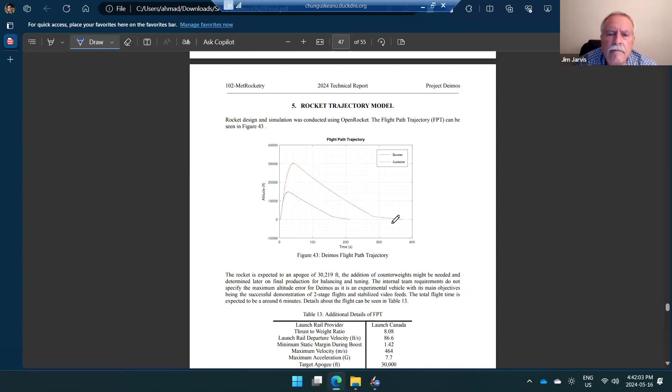We calculated how much RPM, so we can find out what's the right motors we need to compensate. And this is the flight path trajectory. If you want to see it in more detail, I can open it in OpenRocket. No, let's keep going. Okay. Some technical risks and stuff. Now, let me ask you on the payload battery. What are you using for payload battery?

They're using 2S cylindrical LiPos. Okay, but they're compliant with the battery rules. Yeah. Yes. Okay.

Let's see. Let me mention this so I don't forget it. I sent you an email that had a recommended procedure for programming the altimeter. Yes. Have you had a chance to review that yet, or is that down the road a little ways? I just skimmed over it quickly, but I sent it to our recovery lead. I think he read it.

Okay, well, I'm not going to take time right now to go through that, but what I want you to do as the next step of your assignment is to write out a plan for lighting, for programming either the EasyMega or the TeleMega. It'd be the same either way. Or if you use the Blue Raven, the same thing.

But what I want to see is the timing of the flight, and then how you're going to program the altimeter. So the timing of the flight includes the motor burnout, and then if you don't have a separation charge, the next thing would be the time that you want the motor to come up to pressure. Okay. So let's say that you said, okay, my motor's going to burn out at 4 seconds, and I want the motor to come up to pressure at 8 seconds or 9 seconds, let's say.